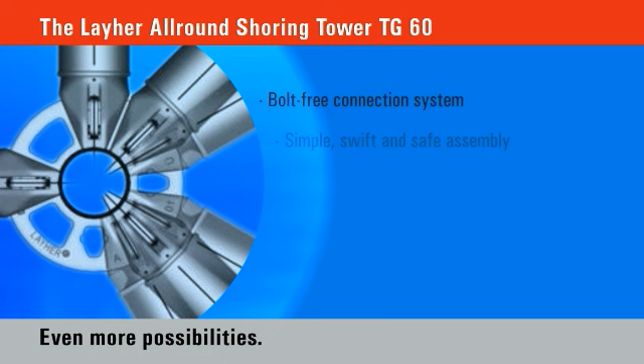Layher. More possibilities. The scaffolding system. With Shoring TG60, Layher now creates even more possibilities. Designed on the basis of Layher's proven all-round equipment, it offers all the advantages of that ingenious system. Anybody already working with the tried and tested all-round system will know the benefits of this technology, and those not yet acquainted with it will be impressed by this system.

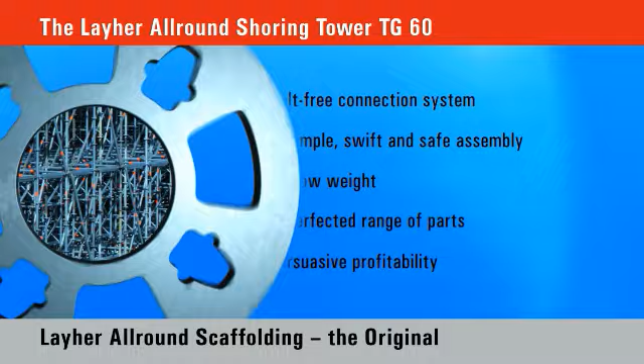With Allround Shoring TG60, Layher has taken an intelligent step forward in the all-round construction kit. It permits a simpler, safer, faster and more flexible assembly, and it also carries extremely high loads. Its structural analysis conforms to the current shoring standard DIN EN 12812. The TG60 therefore meets not only the requirements of current standards and regulations, but also the needs of the engineers and foremen at the site.

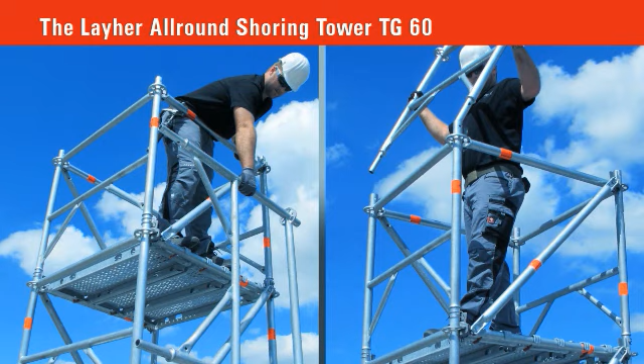The shoring frame TG60 allows shoring to be put up considerably faster. A few lightweight components ensure easy and safe handling, and the integrated advancing side protection minimizes the risk of accidents. The German Professional Association itself has described this innovation as a milestone in shoring construction. That's just typical Layher. You won't be able to build a tower any more swiftly, simply and safely than this.

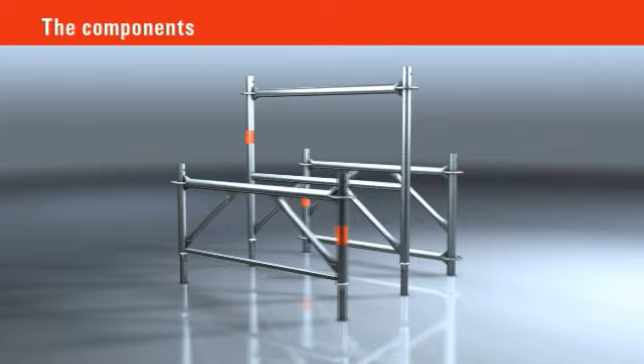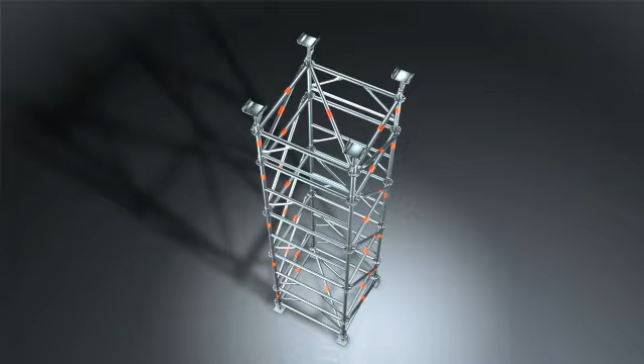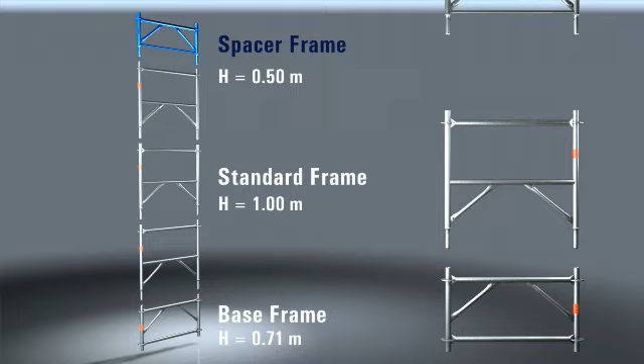The heart of the TG60 are the frames with integrated rosettes. All frames are symmetrical parts. This means that the orientation of the frames can be varied during the assembly. High tensile steel makes the frames extremely sturdy. Each standard can carry up to 6 tons. The shoring frame comes in 3 sizes: the base frame, the standard frame, the spacer frame. All other components for the TG60 come directly from the all-round construction kit system.

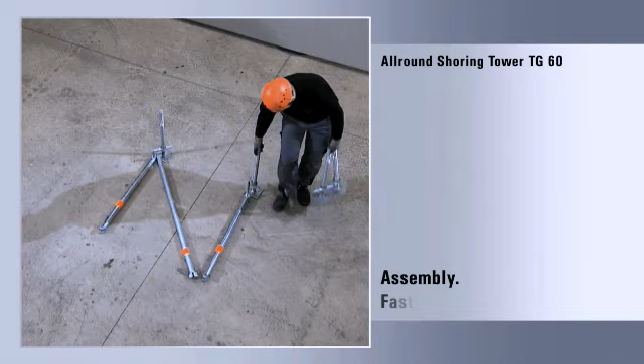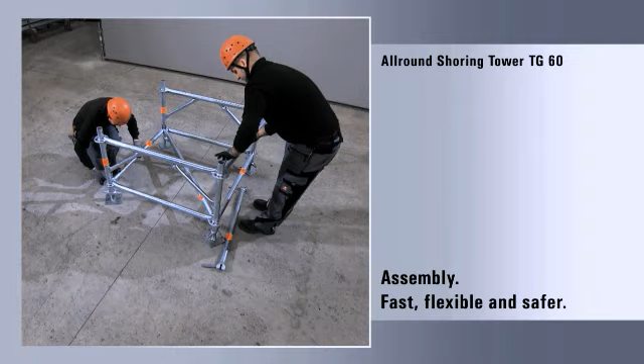Assembly starts with setting up of the adjustable base plates and adjusting of the spindle extension. Then the base frames are inserted. These each have 2 rosettes, at the top and the bottom. At the level of the first rosette, the horizontal diagonal brace is fitted. The base frames are stiffened by installation of the ledgers and diagonal braces.

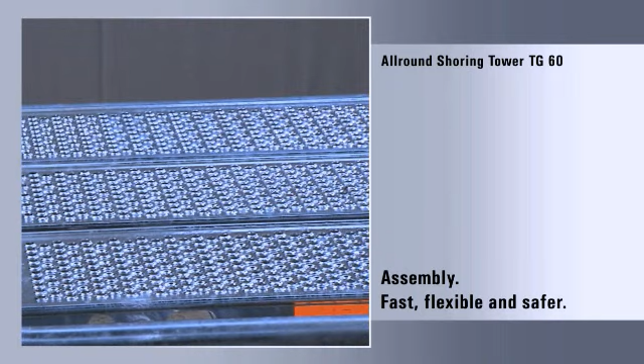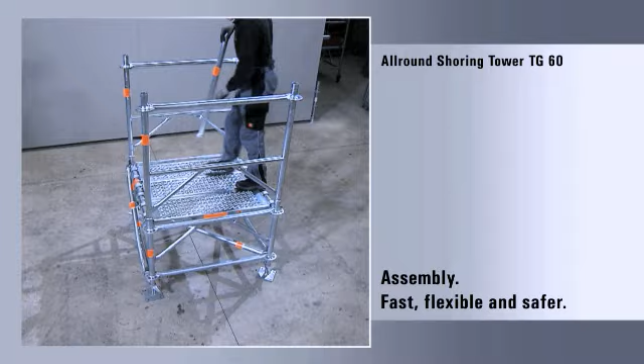The assembly decks are now placed onto the ledges at the level of the second rosette. The result is a closed and non-slip deck level. It ensures a sure footing during the entire assembly and dismantling process, even in bad weather conditions. The second step now follows. The 2 shoring frames are simply fitted into place. Just like with the base frame, this is then followed by installation of the all-round ledges and diagonal braces.

The all-round ledges are about 1 meter above the deck level. They both enhance stability and meet German operating safety regulations thanks to their integrated side protection. In this way, a safer upright assembly is possible without any further accessories. Now the 1 meter high TG 60 frames for the next section can be fitted and the ledges and diagonal braces installed. After that, the assembly decks are repositioned. And this is repeated until the required tower height has been reached.

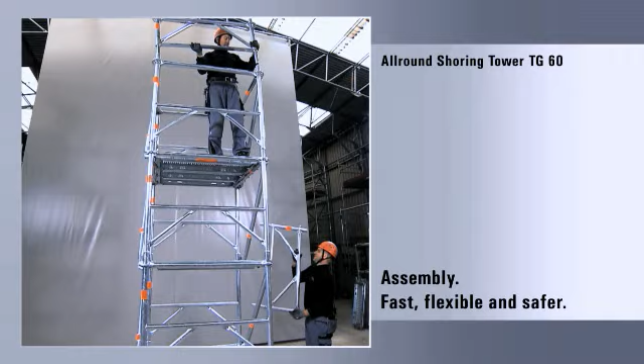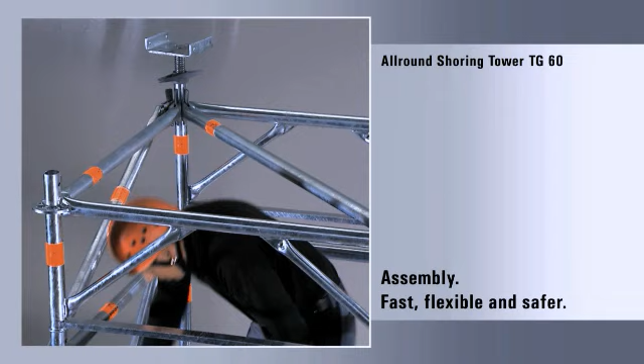The final part is then formed, if required, using the 50 cm high spacer frame. Fit it on and then assemble ledges, diagonal braces and horizontal diagonal braces. Finished. Now the head jacks are fitted and adjusted to the required height. Finally, remove the assembly decks again and the Layher TG 60 Allround Shoring Tower is ready to use.

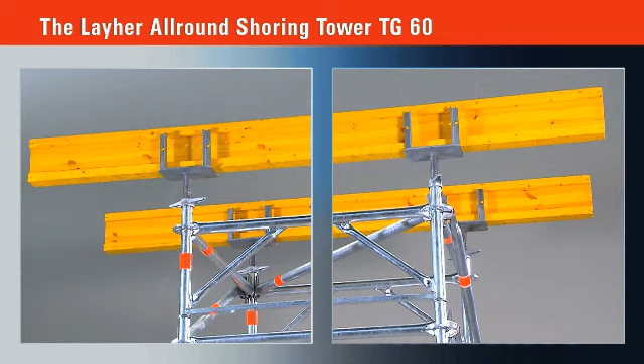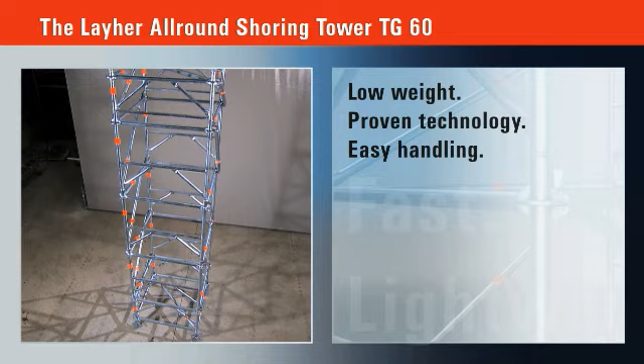Since the new shoring frame substitutes for standards, ledges and diagonal braces, far fewer components are now needed. Assembly and dismantling is thus even more convenient, and the assembly time is more than 30% shorter than for a structure made up of individual components. Other benefits include the low weight of the components, the proven connection technology, and the simplicity of handling.

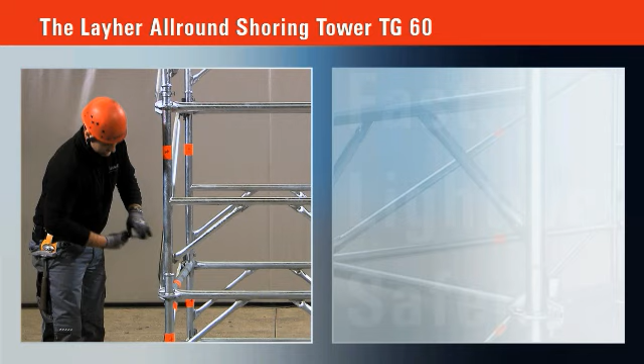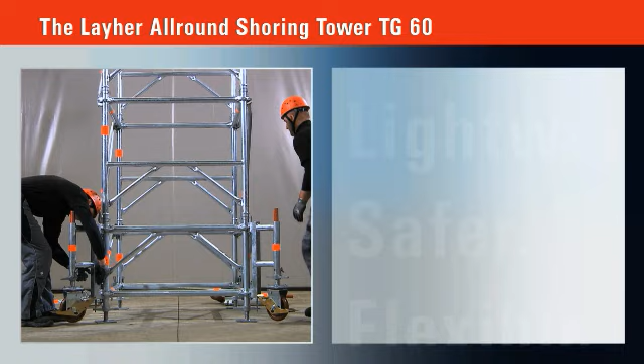Assembly on the ground is also possible. This means that complete towers or individual tower sections can be conveniently assembled without any risk of falls and afterwards positioned using a crane. During transportation, hinged pins ensure that the tension forces are transmitted in the joints. Spindle locks hold the spindles. Easy-to-fit casters allow the towers to be moved. These casters can of course also be fitted to any other Allround structure.

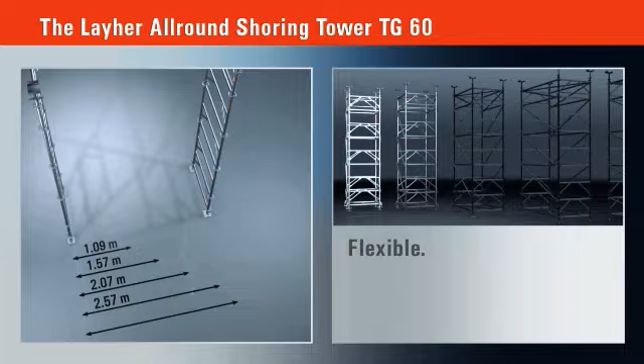Thanks to the integrated rosettes, individual towers can be connected up to form larger shoring units using Allround ledgers and diagonal braces. Time-consuming stiffening measures using tubes and couplers aren't needed here. No measuring of towers, no bolted connections. Variation of the Allround ledgers and diagonal braces allows the shoring tower to be built in 5 different lengths, from 1 meter 9 centimeters to 3 meters 7 centimeters. This means the TG60 can be flexibly adapted to the formwork structure and to the load.

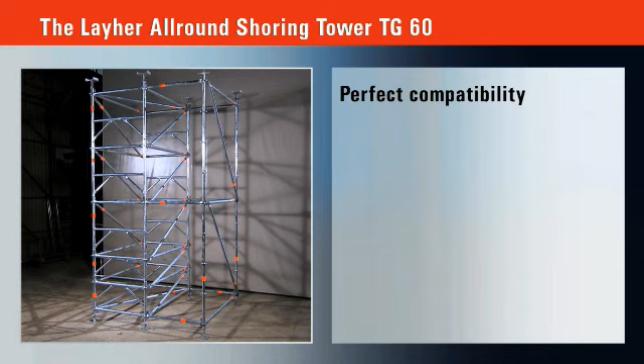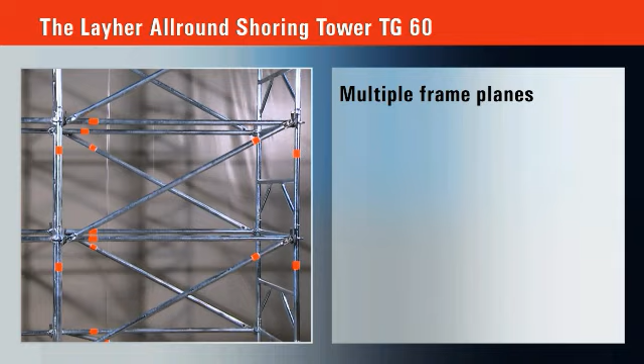For very heavy loads, the frames can be bundled to increase their load-bearing capacity. Adaptations to complex building geometries are possible at any time using components from the Allround construction kit. Lateral extensions with variable bay lengths, or attaching individual standards, or towers with 3 or more frame planes. For integration of columns, the ledgers and diagonal braces are simply removed on one side. The tower can be moved using its detachable casters. Attaching brackets to floor edges or integrating a stairway access makes operations uniquely convenient.

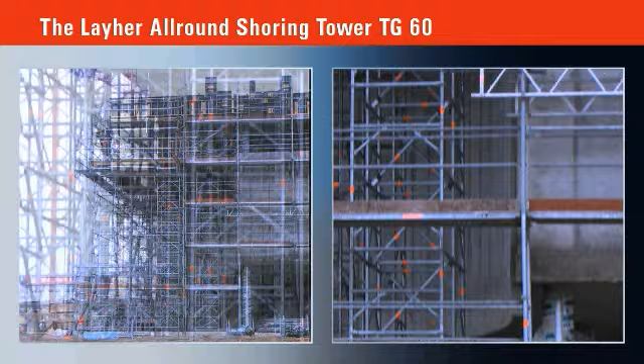We've been using the TG60 from Layher since last year with great success. It enabled us to complete a variety of projects very profitably for our company. It makes us very flexible. We can work safely and quickly, and our customers are very satisfied. And it's fine by us from the economic viewpoint. To our full satisfaction, they assembled shoring structures up to 12 meters high, from which we were able to safely lay the formwork. As regards the new shoring TG60 from Layher, all I can say is that it's a very fast, extremely economical and safe scaffolding system.

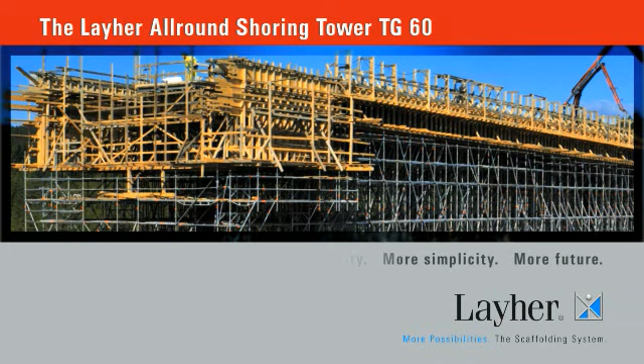With Layher, you have more possibilities, more speed, more safety, more proximity, more simplicity, and more future. You can rely on it, and on our unmatched delivery capacity, in proven quality, and even for large quantities. With the Layher Allround Shoring Tower TG60, an innovative product has once again been designed for the practical user.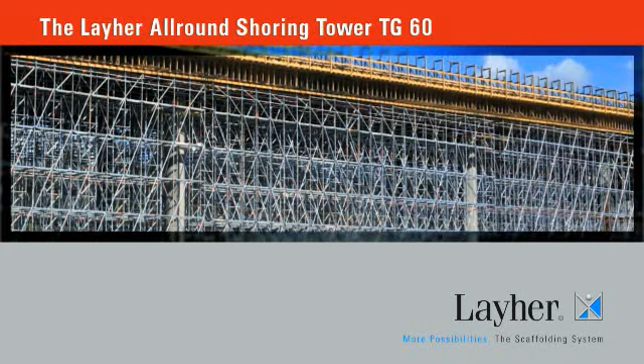The TG60 covers all bases, from a simple slab scaffolding for civil engineering work to complex scaffolding structures with large support heights in industrial and bridge construction, with more than 30% time saving in comparison with structures made from individual parts. Economic success will come quickly. The Allround Shoring Tower TG 60, for the building company for which safety and cost minimization are important. For the scaffolding erector who can use it to open up additional fields of business. The All-Round Shoring Tower TG60, faster, more flexible, safer and more economical.